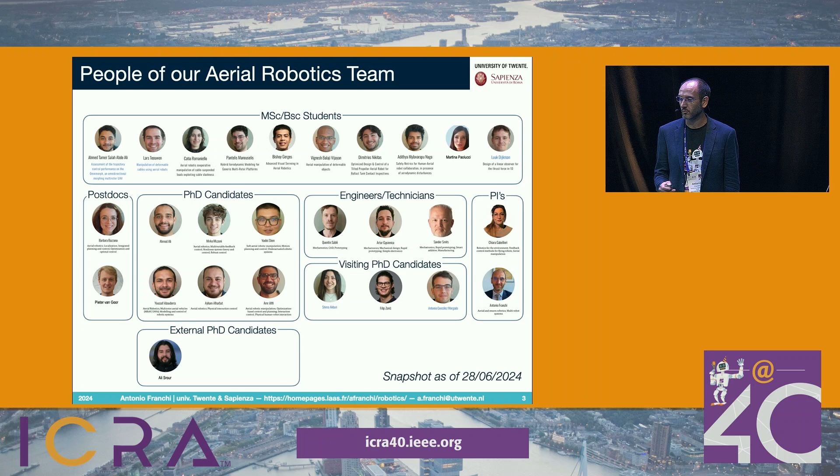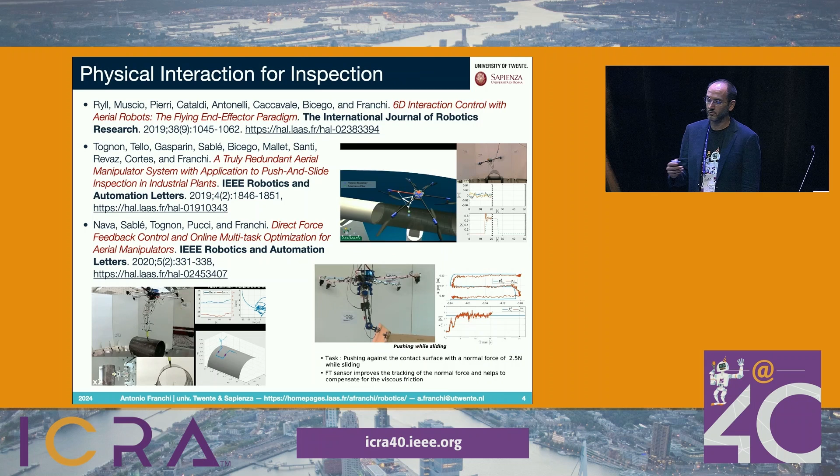So what do we work on? These are our main research lines. We work on physical interaction for inspections, doing aerial manipulation, and we design our robots and our controllers and validate them, and gain new knowledge through this type of experience.

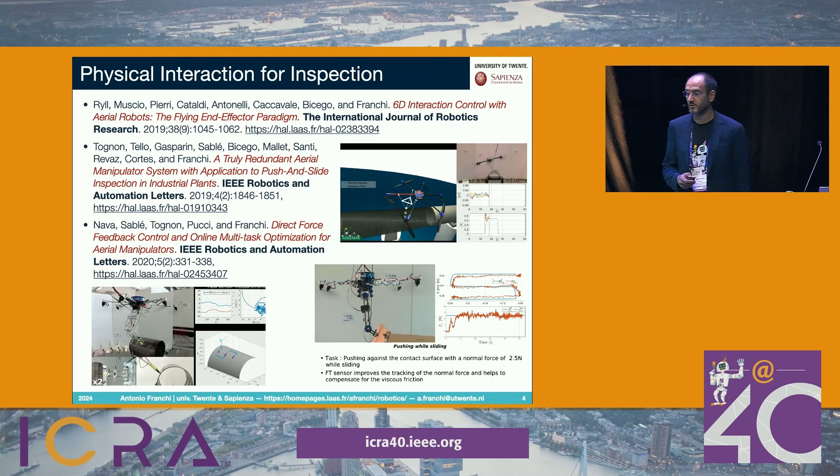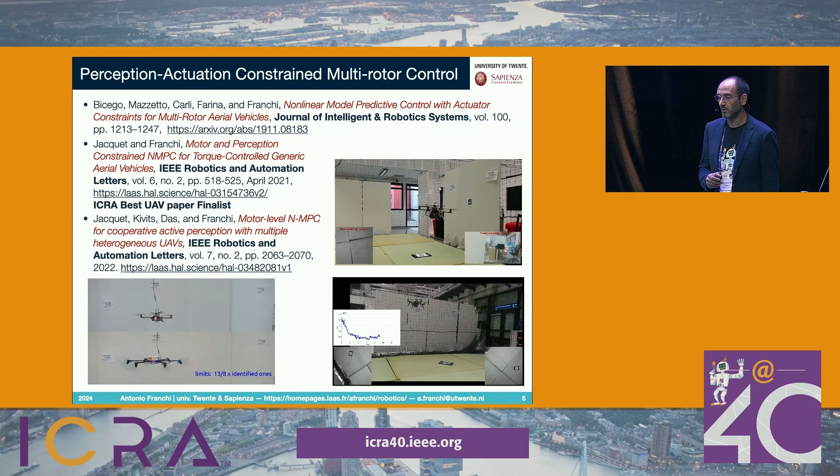We work on perception and actuation constrained multi-rotor control, taking into account all possible sorts of constraints that this type of platform has and their dynamical model.

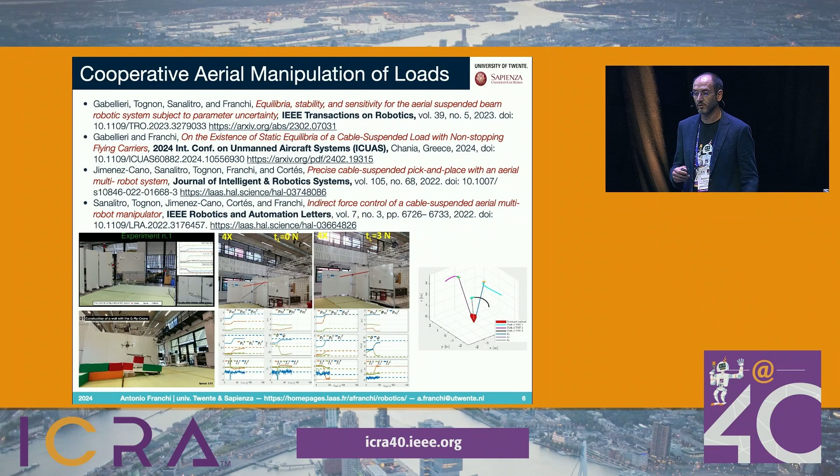And also we work on cooperative aerial transportation and manipulation of big loads, where multiple aerial robots have to be used in order to face the difficulty of manipulating large objects, for example with cables.

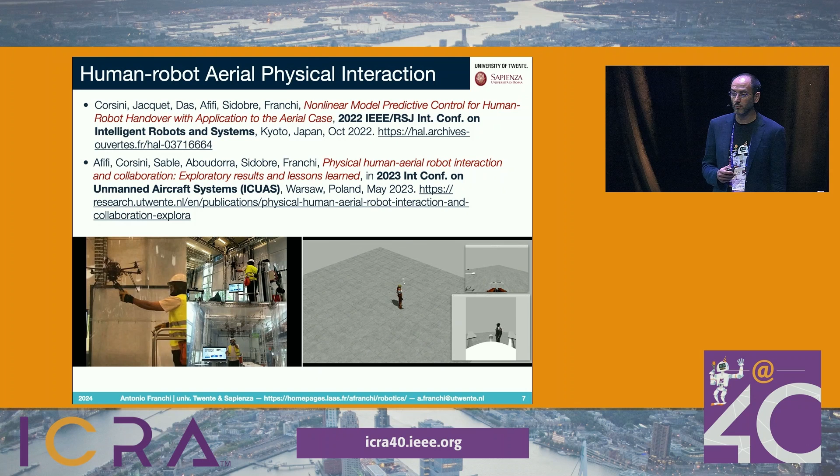We also work on human-robot aerial physical interaction, where human operators can directly interact physically with an aerial robot.

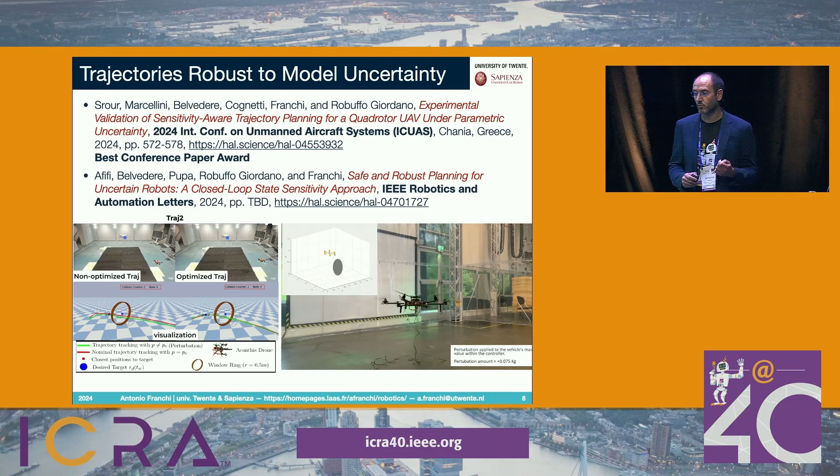We work on trajectories to be optimized in order to be robust to model uncertainty, which is very important in the case of aerial robotics, where aerodynamics plays a big role.

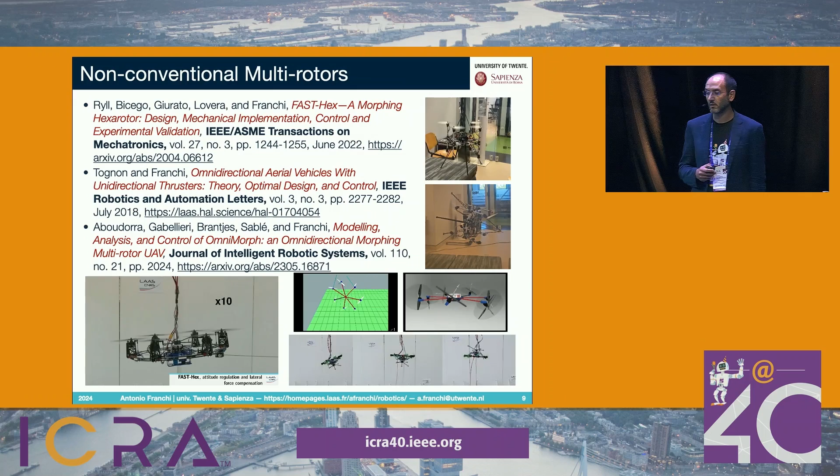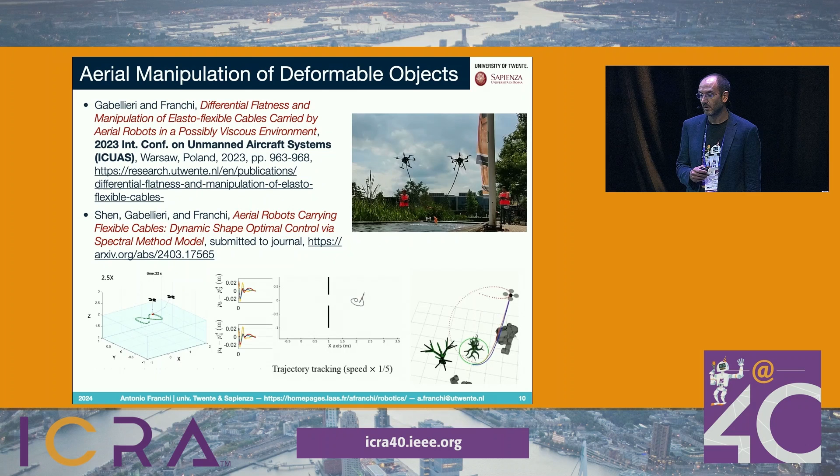And we also work on the design and control of different non-conventional multi-rotors, for example morphing and omnidirectional, and many others. And last but not least, recently we also started to work on aerial manipulation of deformable objects, so objects that have an infinite state space.

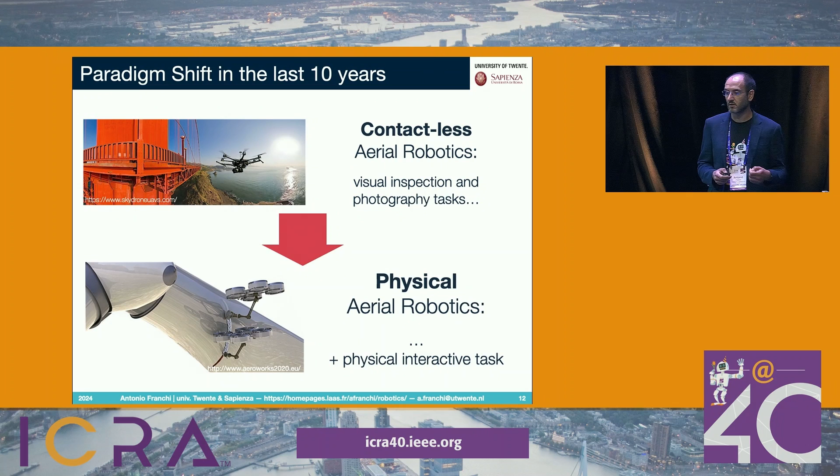So what are the research challenges and how do they emerge in aerial robotics, and in particular in physical aerial robotics? As you have seen in the last 10 years, there has been a paradigm shift from contactless aerial robotics to physical aerial robotics. So this, of course, has a huge amount of applications and also a huge economical impact.

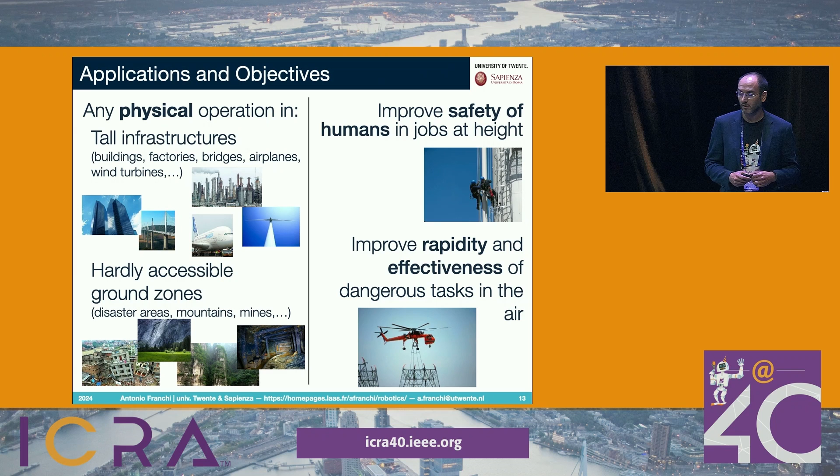I'm sure it's going to have in the future, and also social impact, because we are going to improve the safety of humans working at height, and also improve the rapidity and effectiveness of many tasks that are dangerous and slow and have to be performed in the air.

So research challenges in robotic control, in my view, typically appear in two cases: when you have new hardware, so you need a new equation for modeling the actuation, motion, and measurement phenomena; or you have new physical tasks that are demanded for some reason, and then you have to use certain hardware to achieve that new physical task.

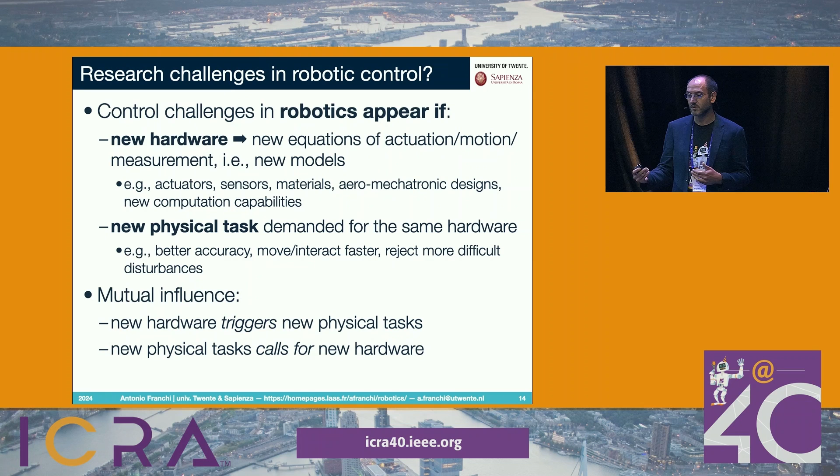But these two things have a mutual influence with respect to each other. New hardware triggers the possibility to do new physical tasks, but also the new physical task calls for new hardware to be investigated. So in aerial robotics and physical aerial robotics, I think there is plenty of possibility to actually do

research, groundbreaking research, and at the edge of knowledge, because new sensors appear constantly, new actuators and very difficult to model actuators are present. I want to remind you that in standard humanoid legged robots, for example, or standard mobile robots, you only have actuators that encompass two domains, electrical and mechanical,

while aerial robots, especially if they have to do physical operation on the environment, they have to cope also with the aerodynamical domain, so with fluid dynamics, which is not fully understood, and especially it's very hard to use our knowledge in this domain in order to perform robotic tasks.

And also, there are plenty of non-conventional and still not fully explored platforms in this domain. And we have a survey on this in the International Journal of Robotics Research, which recently appeared just a couple of years ago.

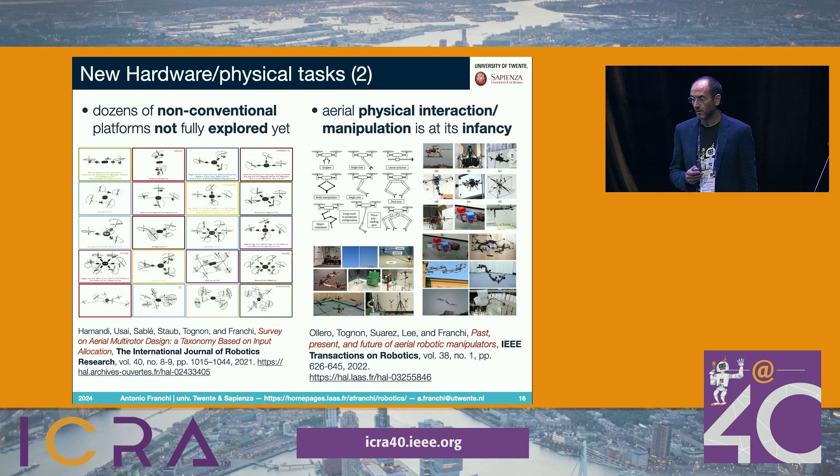Also, there are plenty of aerial physical interaction manipulation tasks that have not been solved at all, especially outdoor in the presence of wind. And there is also a survey on IEEE Transactions on Robotics that recently appeared, if you're interested in the topic, co-authored by Aníbal, who just presented.

So I want to conclude this short keynote with three simple lessons learned. To give you my insights on these messages, I will start from an ICRA paper, which is in line with the subject of this event, an ICRA paper from 14 years ago called 'The True Role of the Accelerometer Feedback in Quadrotor Control' by Martin and Salaun.

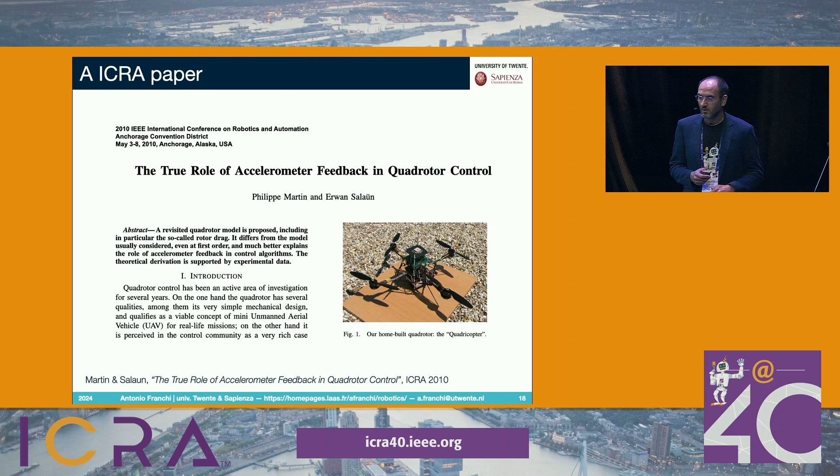I will try to explain very briefly the idea behind this paper. If you use an accelerometer on board a rigid body, and this rigid body has no translational acceleration, then you can use the measurement of this accelerometer as an inclinometer, to measure the angle, the attitude of this object. You can, for example, close the loop from the sensor reading, what I call the pseudo-angle reading, in a standard P controller, and this will work to control the attitude of this rigid body, if you can actuate the angular velocity of it.

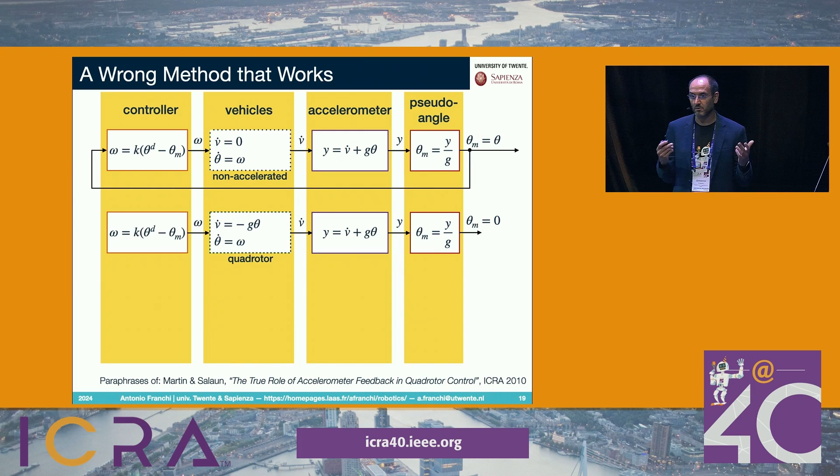But when you put an accelerometer on a quadrotor, the dynamics of the quadrotor are such that when you compute the pseudo-angle, you get a measurement that is constantly zero. If you don't know that, and researchers didn't pay attention to this in the early age, the first 10 years of quadrotor research, you think you are closing the loop with this pseudo-angle measurement. Actually, you are closing the loop with a measurement which is always zero, so it will never work.

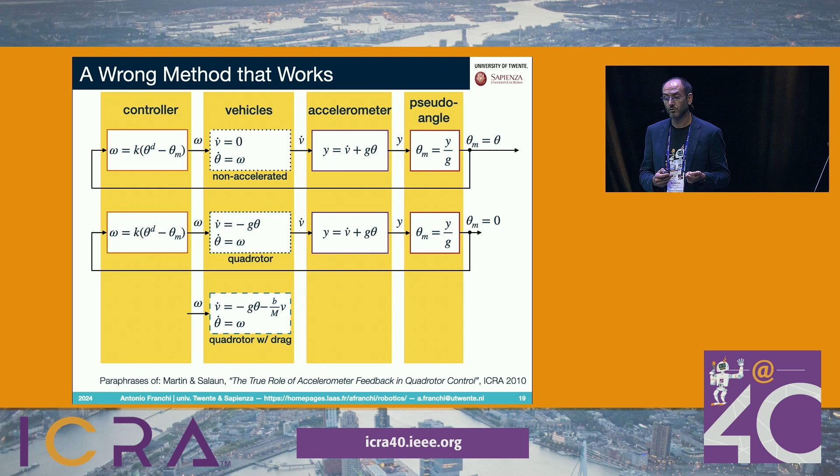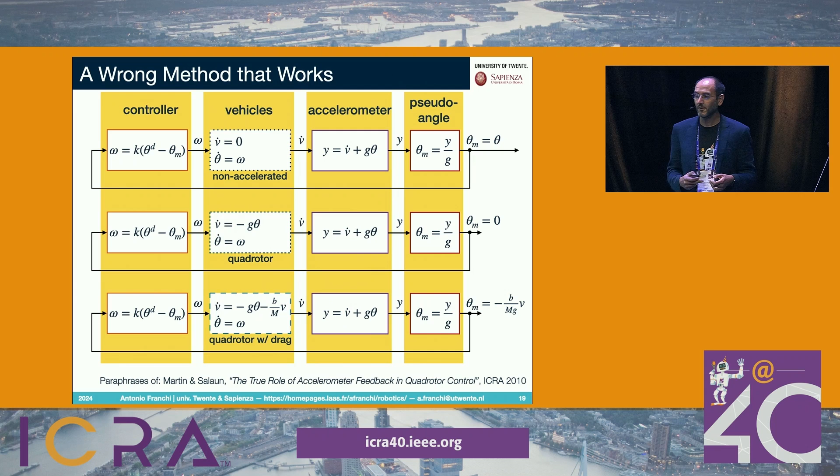However, it works, and people never bothered about this apparent inconsistency. This paper was really insightful for me because it showed that if you extend the model of the quadrotor, gaining more knowledge about your system by modeling, and include the rotor drag of the quadrotor, you can see that this pseudo-angle measured through the accelerometer is actually a measurement of the velocity of the quadrotor. So what you are doing by applying a P controller is actually a P controller on the velocity. It happens that the system is asymptotically stable, and you are controlling not only the angle but also the velocity itself. This is the reason why it works.

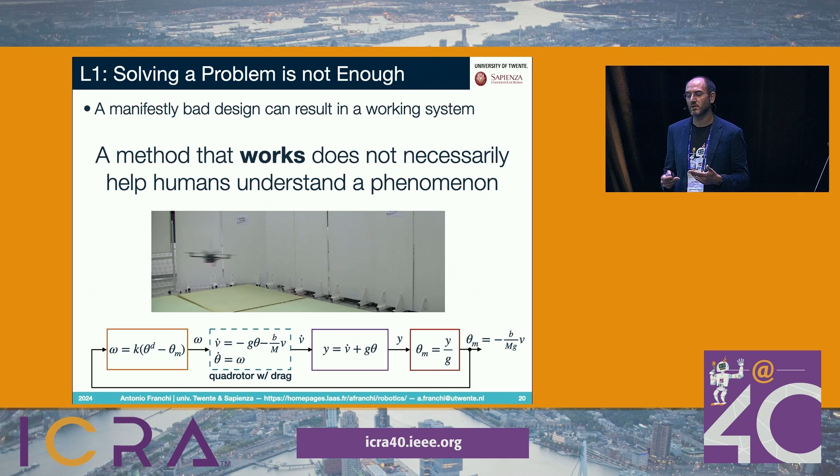Lesson 1 from this: solving a problem is not enough. You can have a manifestly bad design which can result in something that works. But something that works doesn't necessarily mean that you have understood the phenomenon.

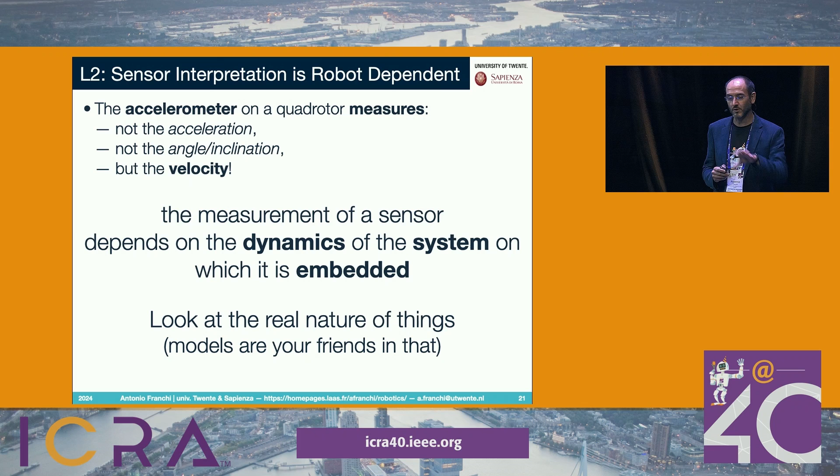Lesson 2: the accelerometer on a quadrotor doesn't measure the acceleration, doesn't measure the angle or the inclination. Actually it measures the velocity. So the interpretation of a sensor's measurement depends on the dynamics of the system on which the sensor is embedded. You cannot consider the two things separately. Look at the real nature of things, not just at their label, or what is on the box when you purchase them. Models are your friend in that.

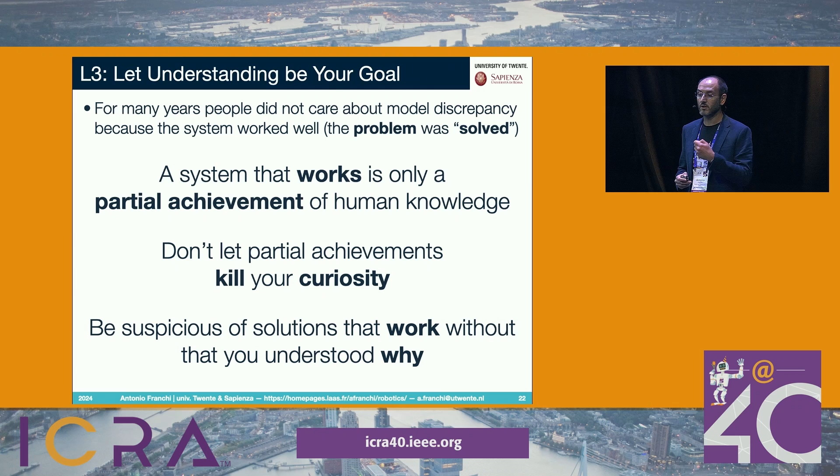And I want to finish with a paraphrase of this famous quote, which has been presented already a few times in this event: all models are wrong, but some are useful. By changing it: all models are wrong, but some work when combined together, and there is another model explaining why. Thank you for your attention.